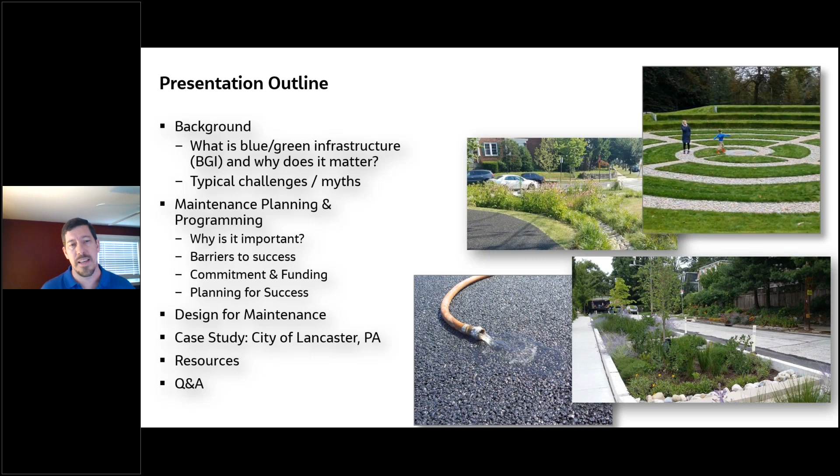How can we plan for success? And then the next step after planning, how can we design for maintenance, for better maintenance, more feasible and easier maintenance? At the end, Kate is going to talk about her experiences maintaining green infrastructure in the city of Lancaster, Pennsylvania. We'll close with some resources, a lot of good links, helpful, useful links, and then hopefully have some time for Q&A.

So before we dive in, we do have a poll question that should come up. The question is, are you planning to implement blue-green infrastructure in the near future? And the answer is multiple choice: yes, we have implemented some type of BGI; yes, we're planning to, but we haven't done so before; we are considering it as a possibility; or no, not unless we're absolutely forced to do so. We'll give everyone a couple seconds to fill this out.

And we can see the results here. More than half of everyone on this call has implemented some type of BGI. About a third is considering it as a possibility, and about 12% said yes, we're planning to, but we haven't done so before. Then 6% of you said no, not unless we're forced to, or we have to for some reason. So good to know where we stand. Thank you for answering.

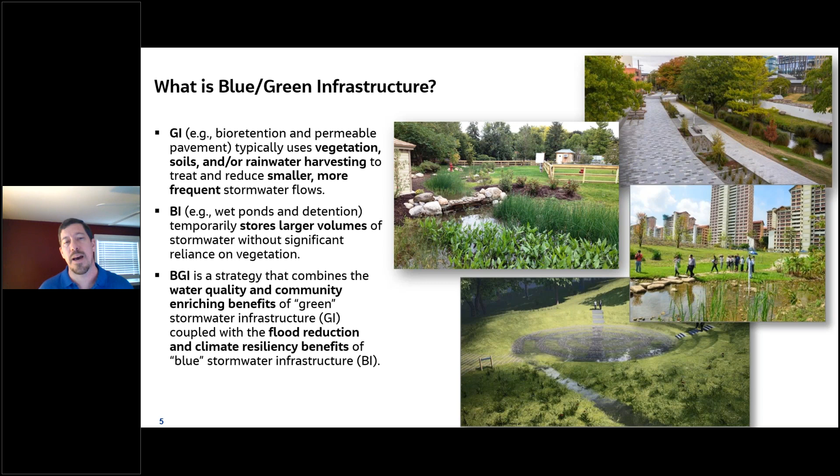Green infrastructure, on the other hand, is things like bioretention, permeable pavements. These are systems that use either vegetation or soils or rainwater harvesting to treat and reduce the smaller, more frequent stormwater events. When we put those together, it becomes a strategy for controlling or treating water quality, having community enriching benefits—that's the green side of things. And we also couple that with the blue side of things, the flood reduction and the climate resiliency. So that's really what we're talking about here when we say blue-green infrastructure.

So why does it matter? Well, it matters because it's responsive to regulatory drivers, whether it's new or redevelopment stormwater regs, MS4 requirements, CSO requirements, or green building certifications. There's a variety of these regulatory drivers that exist and really push the use of blue-green infrastructure.

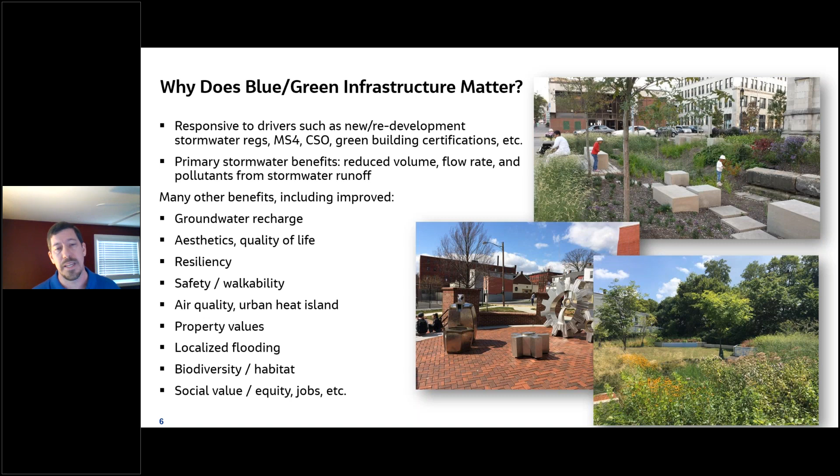Of course, the primary benefits are reduced volume of runoff, reduced flow rate, and reducing typical pollutants in stormwater runoff. And of course, there are lots of other benefits from groundwater recharge to resiliency, improved aesthetics and quality of life, improved safety and walkability, localized flooding reduction, and biodiversity. The social value, equity, and jobs creation are all real and quantifiable benefits of blue-green infrastructure.

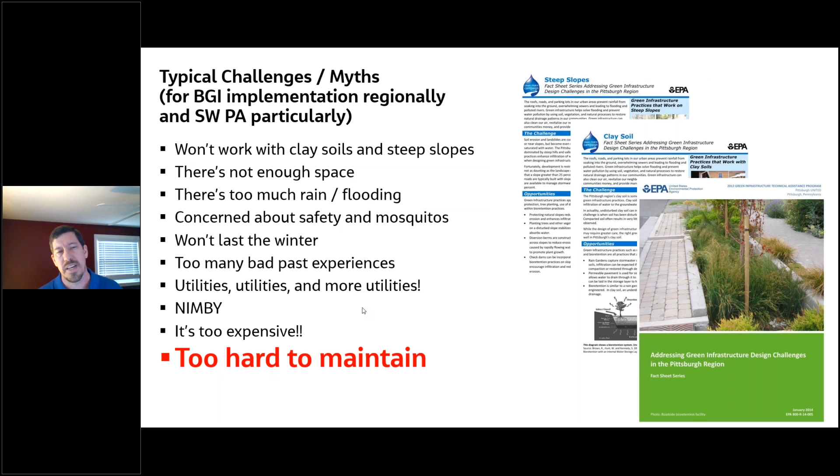But of course, it's not easy. There are real challenges to implementing blue-green infrastructure, and there's also myths, perceptions that are out there. Of course, we've all heard these.

Maybe we think these: that blue-green won't work with clay soils or steep slopes, there's not enough space, there's too much rain, too much flooding. What about mosquitoes? The winters we have here are so harsh it's not going to last the winter. We've done it before and it hasn't worked, too many bad experiences. We have so many utilities, how do we work around those? We've all heard NIMBY, not in my backyard, we just don't want it here. It's too expensive. And then, of course, what we're really focusing on today, it's just too hard to maintain.

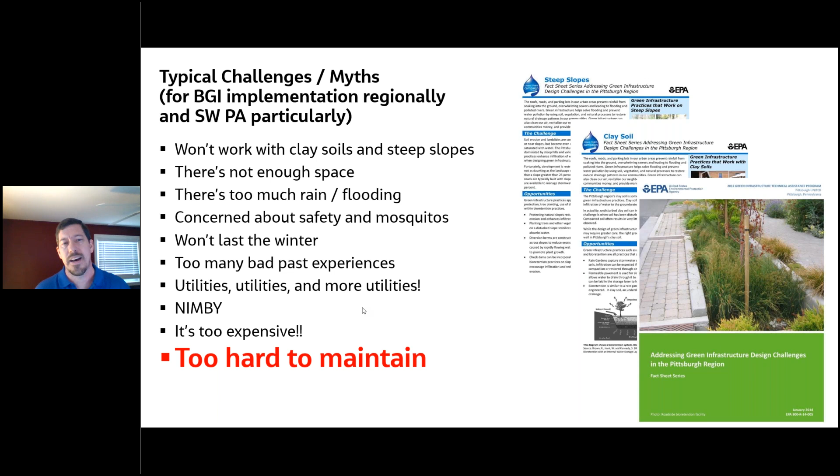So is it really too hard to maintain? Is that a challenge, or is that a myth? I think it's a little bit of both, and we'll get into that and hopefully dispel the myth that exists around it. So why is maintenance critical?

These are fairly obvious. Of course, it ensures the long-term performance of these practices. These are capital investments, assets we're putting in our communities, so we want to protect them. It's important for aesthetics, we don't want these practices to become eyesores. We have to meet regulatory requirements, whether on the public or private side. There are public health issues, like the idea of mosquito breeding. There's public community perception, when we see water in a rain garden or bioretention area, is that water supposed to be there? Is that ponding normal? We have children that play in these communities, on these streets and in these parks.

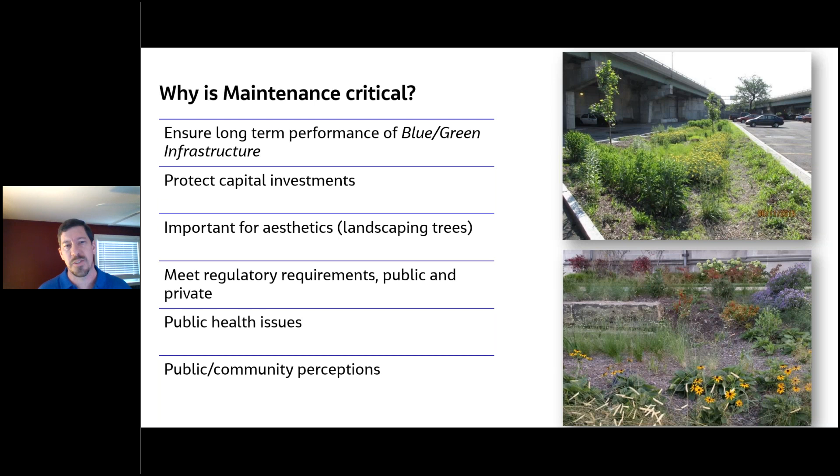And of course, there are a lot of common failures and lessons learned. These are all real world examples. There's the lower left-hand corner of a porous asphalt installation. We might look at that and think, well, it's about time we seal that up. The lesson learned there is that signage and education matter. We have to get the word out that this material is porous, and you don't want to repave over it or seal it. What are those weeds doing in that planter?

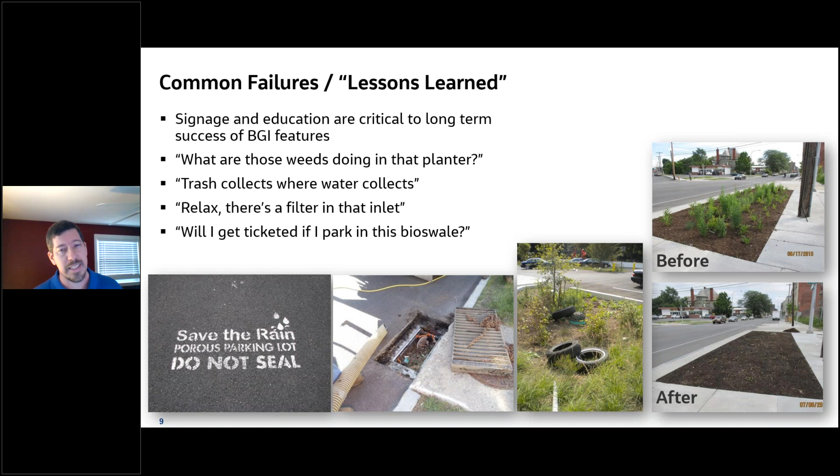On the right side you see an example. The before shows a stormwater planter alongside a street. A resident living right there thought those were all weeds and pulled them out. Of course, trash collects where water collects. Bioretention areas in residential developments might look like good spots to toss old tires or other trash lying around. And of course, we put in things like filter inserts and may think, well, just relax, there's an insert in there, we don't have to worry about that for a while, we're good. That's obviously not the case. Everything does have to be maintained.

And of course, there are a lot of barriers to effective blue-green infrastructure maintenance. There's a lack of funding for operations and maintenance, which really comes down to resources. Maybe our communities don't have the specialized equipment or staff we need. We don't have the training for the specialized needs of blue-green infrastructure, or consistent inspection and maintenance procedures or enforcement policies. And the public's just not aware of what these things are, what they do, or how they should function.

So I'm going to turn it over to my colleague Susan now, and she's going to get into how we integrate new and different O&M protocols into our existing O&M programs and operating budgets, and how we really institutionalize blue-green infrastructure maintenance.

Thanks, Dan. If I get control here.

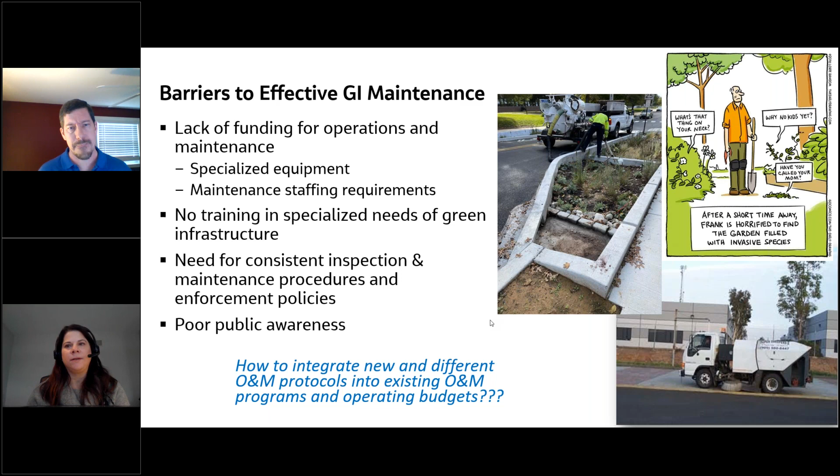There we go. So I'm going to talk about maintenance planning and programming, and I think these strategies really can be applied, scaled up or scaled down depending on the level of implementation within your community. Just to start, we'll run through some of the key strategies for BGI O&M planning and programming. I think these types of strategies really go along with any kind of major initiative within a municipality or region. Commitment and funding is clearly the most critical element to start and get things moving. And in addition, planning and design are very important in terms of designing and planning for minimal and/or effective maintenance for any kind of green or blue-green infrastructure program. Gaining community endorsement is critical.

And looks like we've got some kind of, I don't know what that is, sorry.

Gaining community endorsement is critical. Establishing policies and standards for O&M, education and training, and then monitoring and tracking those BGI systems is critical. So we'll touch on all these.

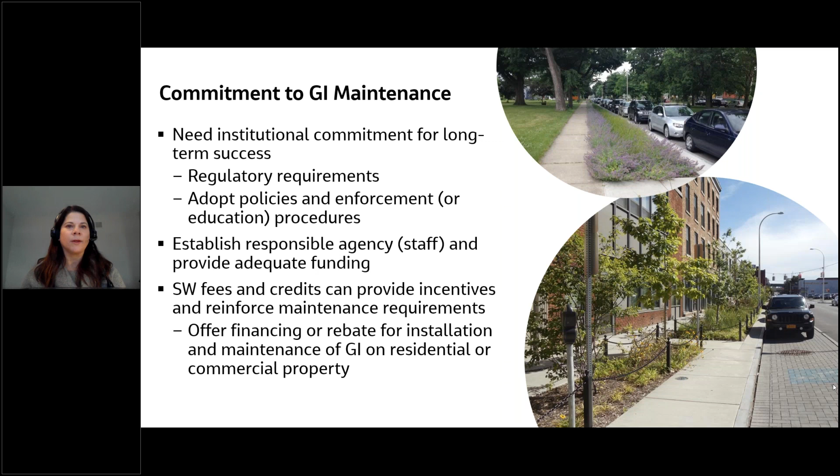In terms of funding, some cost considerations, I think it's really critical to first of all establish a business case for green infrastructure maintenance, really looking at the incremental costs of maintaining green infrastructure compared to conventional infrastructure, because everything requires maintenance.

Oftentimes, green infrastructure maintenance with respect to landscape is very similar to any other kind of parks or landscape maintenance budget, so that can be incorporated within already existing maintenance budgets within a community.

Looking at economies of scale is a cost-saving strategy. It's a lot easier to keep maintenance crews busy full time. The more green infrastructure that you're implementing, oftentimes that can help be a cost saver. Also, when you're implementing, you can outsource these as contracts. So if you have a number of bioretention type systems, you may be able to outsource that to a landscape contractor and have an economy of scale savings there.

Note that O&M costs really do vary widely. It depends on the size and complexity of the green infrastructure system. Very highly visible locations will typically require more maintenance than a system that's not as obvious to the public. So all of those things factor into maintenance, and also maintenance is adaptable.

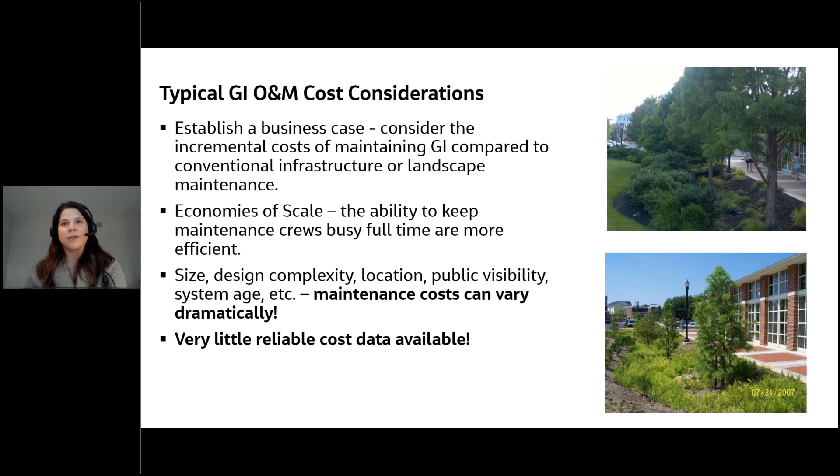There's not a whole lot of reliable data out there right now in terms of cost, so a lot of organizations are having to look at what their own costs are in order to plan for that. As an example, here are some typical O&M costs per square foot for green infrastructure.

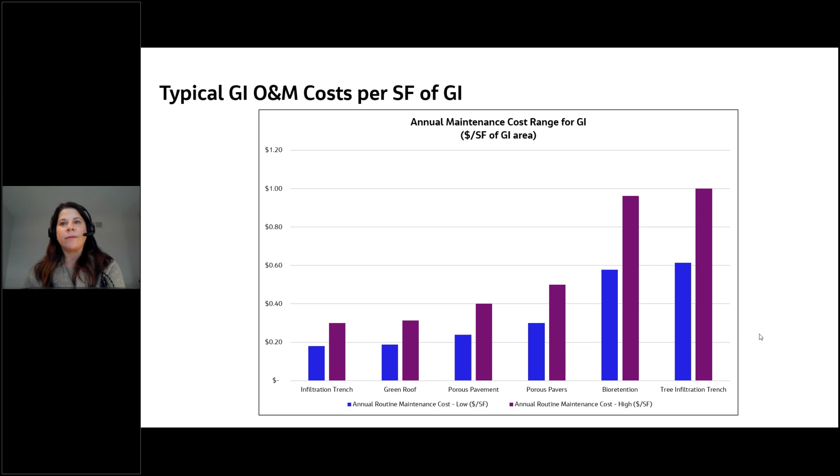When we look at this, we can see that vegetated systems like bioretention on the right and tree infiltration trenches tend to be more expensive on a dollar per square foot basis, simply because they tend to have a little bit more maintenance required associated with the vegetation.

But when we look at O&M costs per acre of impervious area managed, bioretention costs look a little bit lower, because typically you can direct more runoff to a bioretention area, and it can manage more runoff per square foot than, say, a porous pavement system that's just receiving the runoff that lands on it. So there are different ways that you can manage your budgets and look at how cost-effective various green infrastructure technologies are.

Some strategies for paying for green infrastructure maintenance: stormwater utilities, I would say, are a very popular method. They provide a stable revenue source and an equitable approach. Typically, these fees are based on area of impervious surfaces for each property owner, and they also help to incentivize private investment, either through credit programs or other means that might allow for cost savings for those paying the fees.

Some other strategies are alternative financing, such as public-private partnerships. An example in Lancaster: the city got PENNVEST funding and was able to partially fund private green infrastructure projects, and the private property owner had to sign an agreement to then maintain it. So the city was able to help fund those systems, get a benefit from a green infrastructure perspective, and the private property owner was responsible for maintaining it.

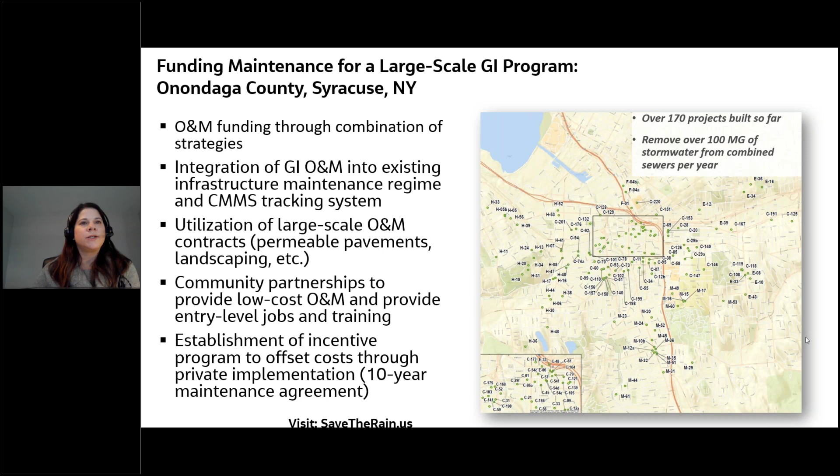Quite a lot of green infrastructure, and some of the strategies Onondaga used were, first of all, incorporating green infrastructure into their existing CMMS tracking system. So they took an asset management approach and developed a maintenance, training, and inspection program.

They also utilized large-scale O&M contracts as a cost savings for things like permeable pavements and any landscape O&M. They entered into community partnerships to provide low-cost training and entry-level jobs for disadvantaged youth, giving them summer jobs to help cover the O&M of those landscaping type BMPs and GI.

And then they also established a grant incentive program whereby they would help fund green infrastructure on private property, where the private property owner had to sign an agreement to maintain that GI system for at least 10 years. So these are just some of the strategies used in this particular program.

And we mentioned O&M and green jobs. Green infrastructure does require a workforce with new skills. It can create long-term permanent jobs, whether it's inspection or maintenance.

And we talked a little bit about how youth can be engaged, and part-time, entry-level jobs can be incorporated into a green infrastructure program. This is done in Onondaga, and I think Philadelphia also has a similar program.

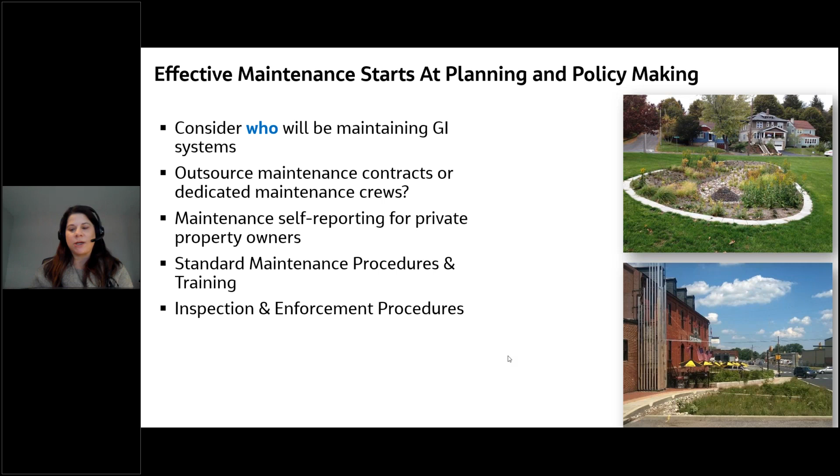Sorry, I went too far here. So here's an interesting case study from Milwaukee Metropolitan Sewer District. For this study, an O&M framework was developed based on stakeholder input to figure out, within the sewer district which has had a number of municipalities, who should be responsible for doing the maintenance, whether it should be a regional entity, controlled by the municipalities themselves, or a private endeavor. And the framework was looked at based on financial considerations, the ability to be implemented, and social and community impact.

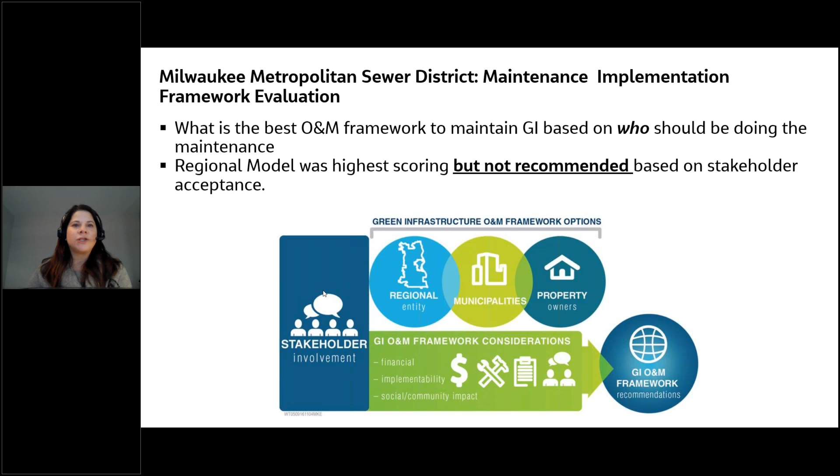Through that polling and study with the stakeholders, it was recommended that the most cost-effective model would be to have a regional maintenance entity, but based on feedback from the stakeholders, it really wasn't recommended because municipalities and private property owners wanted control over their own maintenance. So in the end, the recommended cost-effective model wasn't acceptable to the stakeholders, and it was modified so the regional model was really only used for training, while all other maintenance control and responsibility was at the municipal and private level ultimately.

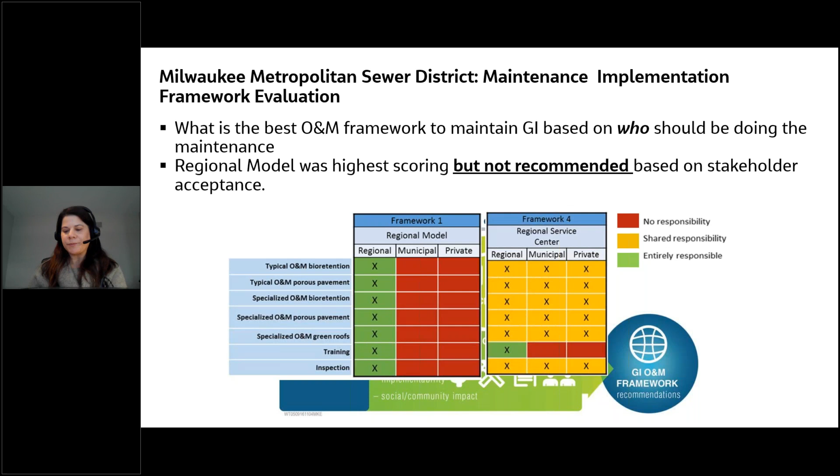When developing standard maintenance procedures, I think it's critical to understand that many of these maintenance activities for green infrastructure are not all that different than the maintenance that's already occurring at the municipal level, in terms of inlet cleaning and landscape maintenance. A lot of it is quite similar.

The maintenance procedures will vary based on system function, visibility, size, drainage area size, and the type of land cover. Green streets typically have a lot more maintenance than a park site, simply because of the usage and the amount of dirt and debris you find on a street compared to a park. As we mentioned before, visibility matters.

Anything that's visible on the surface will typically require more maintenance. At the same time, having a visible surface system is also very helpful because you can see when a system actually needs maintenance.

Inspections should be established, an inspection routine, and a lot of times that's required for regulatory requirements. And as we mentioned earlier, maintenance will vary through time, so adaptive management is important to consider.

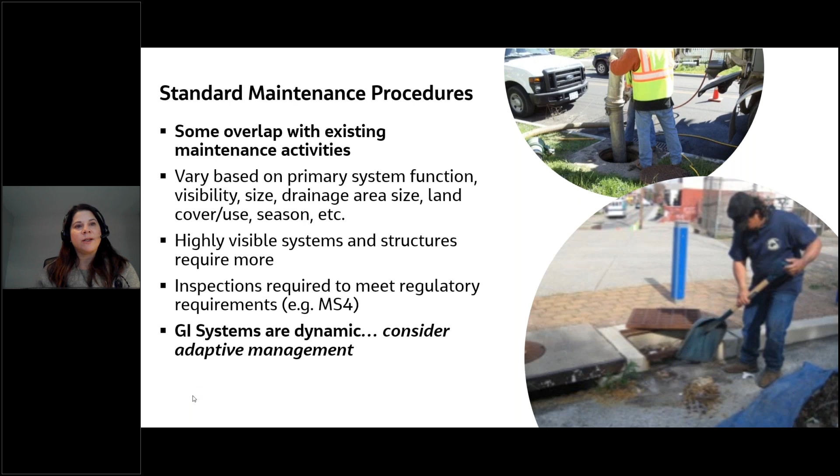Differences between blue versus green infrastructure maintenance: when we're talking about blue infrastructure, larger storage systems tend to have more concentrated flows into a large system, with larger drainage areas. But given that those systems are often designed with more robust pretreatment, sediment, or trash forebay, those types of larger systems often require typically less maintenance, or reduced frequency of maintenance, as long as those pretreatment systems are built in.

Green infrastructure tends to be more distributed, with smaller drainage areas, so it's many small systems. Depending on the visibility or type of system, they may require more frequent inspections and cleaning, simply because a smaller system isn't going to have the ability to have a larger, robust pretreatment type. The combination of both, obviously, they overlap.

It really depends on the technology that's being used. But even a large bioretention system is going to have a similar maintenance regime as a small bump out, for example.

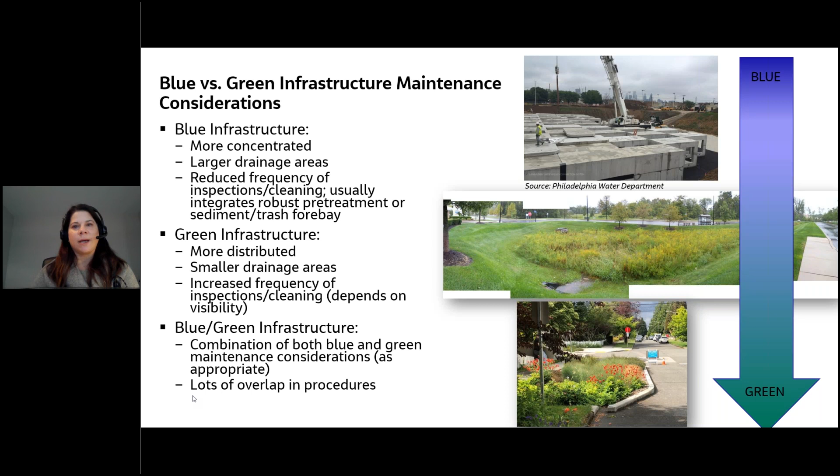A case study example here: O&M guidance manual. This was actually developed by Alcosan, who implements a grant program to its member communities to help fund green infrastructure programs, and they put out a number of guidance manuals, one of which was an O&M manual.

The manual established maintenance regimes for routine, non-routine, and general maintenance activities by green infrastructure type, and they looked at the typical green infrastructure systems they were funding, which were infiltration trenches, bioretention, and permeable pavements, the three categories. Their plan covered maintenance frequencies, and you can see an example of that here.

The frequencies are established dependent on service level, whether it's high, moderate, or low service level, and that touches on what we were talking about before with respect to visibility and type of GI technology.

For the purpose, they also developed maintenance inspection checklists, including a self-certification process whereby the grant recipient would need to submit an annual self-certification form to Alcosan to demonstrate that they had been maintaining the system that was funded. All of this was designed to protect Alcosan's investment.

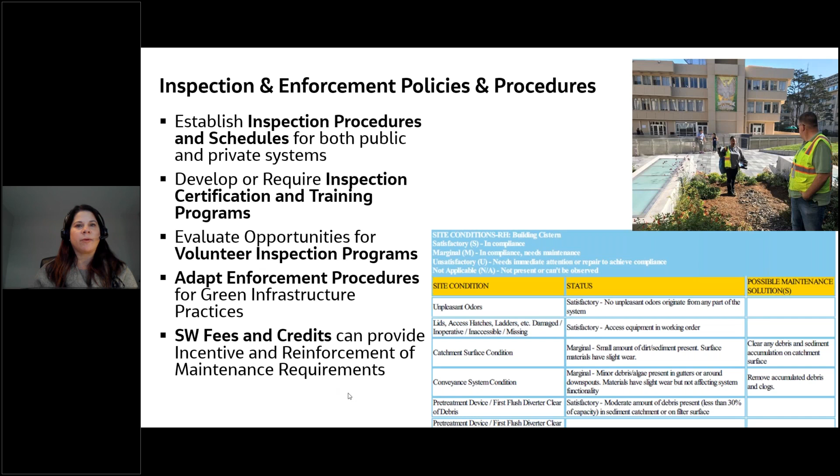And we talked a little bit about fees and credits, which can help to provide incentives for maintaining the systems.

Another case study here from San Francisco Public Utility Commission. As part of their MS4 permit and their stormwater ordinance for developments on both private and public properties, in order to get permitted, the green infrastructure system needed to have a maintenance plan. The property owner would then be required to submit a self-certification checklist on an annual basis.

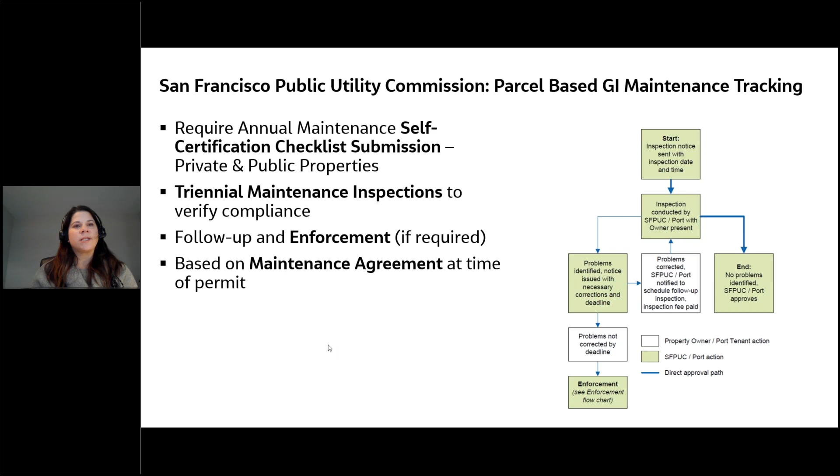The Public Utility Commission themselves actually set up their own triennial maintenance inspection that would go out to each of these public and private sites and inspect them to ensure they were actually being maintained. The program included enforcement if they were found not to be in compliance. So, a pretty robust program out of San Francisco for their MS4 permit.

And then just some information on training. There's a number of training programs out there for green jobs training, and this is just a listing of some of those here. I won't go into them, but I'm sure many have heard of the National Green Infrastructure Certification Program. That's probably one of the biggest ones, but there's also one in Chesapeake Bay, Maryland, and some other states throughout the country also offer contractor training and maintenance training for inspectors as well as contractors that would perform the maintenance.

And we have poll question 3 here before we move on to Kate. So what are the greatest challenges or concerns you have regarding maintaining blue-green infrastructure? Cost, lack of resources whether it's equipment or staff, already having too many things to maintain, training, or other.

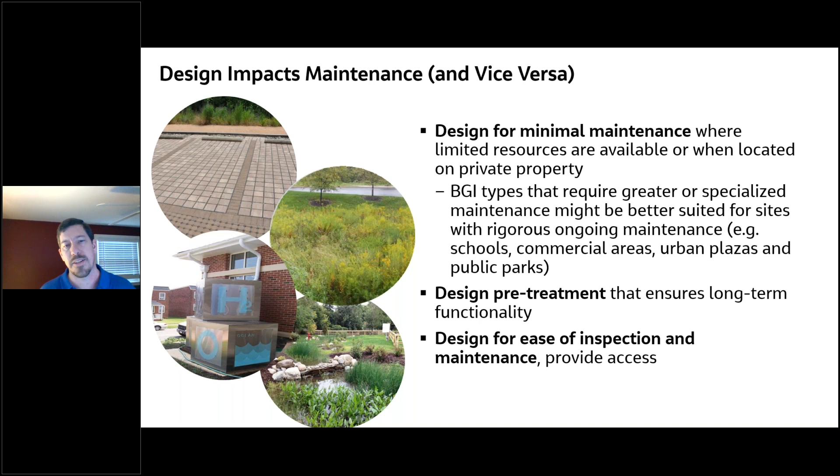So I'm going to go into a little bit more detail, not too much, but on the vegetation side of things. I'm an engineer, I'm not a landscape architect, so bear with me a little bit here. But we first really need - and this gets back to the context of the site - we have to understand the context, the soil conditions, the hydrologic conditions.

For example, if we are designing a bioretention system with very sandy soils, we want to make sure that our plant species are drought tolerant. Those soils could drain out pretty quick and could create dry conditions. We want to make sure we're designing for that.

If we're designing green infrastructure in the roadway, which we do all the time, and the city of Lancaster has numerous examples, we want to make sure that the plants that we're specifying are salt tolerant. They can handle that environment, they're going to thrive in that environment. We want to make sure that we're avoiding bare areas, and I'll get more into that in a second. We want to consider a layered or mixed plant community approach rather than just large swaths of species.

And we'll talk more about that in a second too. Really, we have to be realistic about the maintenance capabilities, the resources that are at our disposal, and the preferences of the community. We can't ignore any of those things.

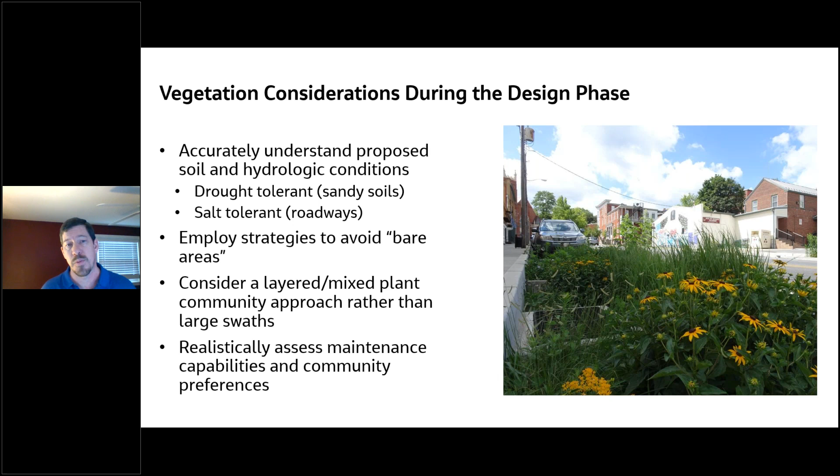Back to the employ strategies to avoid bare areas. Really, we're concerned about two things here: erosion and weeds. With erosion, we want to think about how we can prevent against it. We might want to use biodegradable erosion control fabric, especially on slopes, knowing that before the plants are established, those slopes and soil are going to be susceptible to erosion. So we want to make sure that we put in the fabric as needed.

We want to place tougher plants near points of entry to runoff, and they're going to act as natural energy dissipators. That's not necessarily replacing, but more like in addition to structural energy dissipators that we might have using concrete or rocks or things like that.

We want to plant densely, using a denser spacing to eliminate the opportunities for weeds. And we want to consider a layered plant community approach. This is the idea of green mulch, where we use diminutive filler species to fill in the gaps. Doing this layered approach really does improve the resilience of the system, especially to varying conditions of light and water.

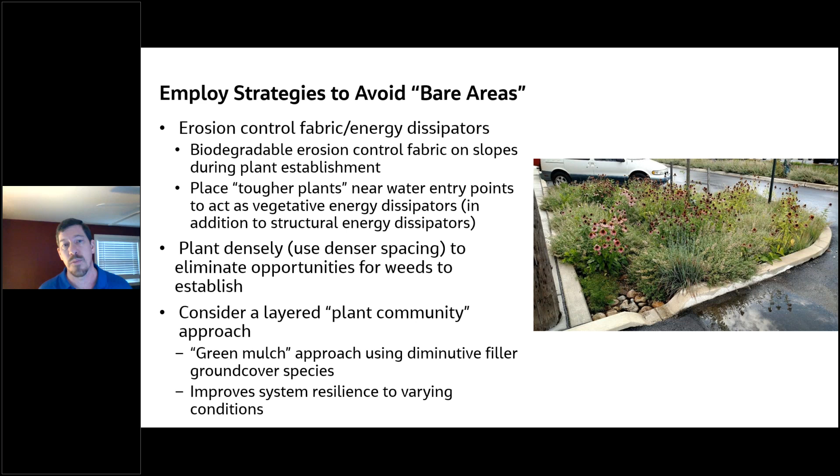So we want a hardy, robust, resilient system, especially when it's in the roadway. And again, we want to realistically assess the capabilities of our maintenance staffs and our community preference. We want to try, if possible, to keep our plant palettes simple, maybe lump together those species that have similar types of maintenance. So maybe grasses and perennials get lumped together and shrubs are separate.

Maintenance staff may not know how to distinguish between weeds and the desired plants in those systems. I have a rain garden that takes up half of my front yard, and I've been working with green infrastructure for years, and I struggle with: is that a plant? Is that a weed? It's hard to tell, and so we really do need to make sure we provide our staff with the proper training and the proper resources.

And then with respect to the community, we want to think about what they might like. Is a more naturalistic palette, which will look weedy, is that okay? Or do we want something that's more garden-like? So we've got to keep all these things in mind.

Now we have a quick activity here. We're not going to do this as a poll, we're just going to run through these. But this really is meant to be fun, just to test your knowledge of is it a weed or is it a plant that we would use in a green infrastructure system like bioretention.

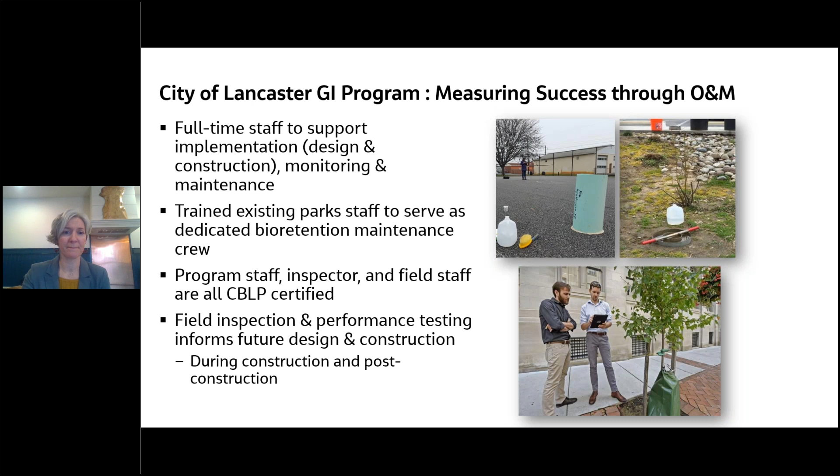Some of the things we're also tracking are the design performance of these systems, gallons of stormwater we're capturing annually, and how many permits and credits we're issuing each year. We have a stormwater ordinance that requires installation of stormwater management practices for any installation of impervious surface over 100 square feet, so we have a number of permits going through every year—projects implemented by the city on the public side, and also privately through that permit system. We're also tracking the pounds of nutrients diverted, as well as all of our public outreach and interactions.

We really see public engagement as a key piece to the success of our program, making sure residents understand and appreciate the green infrastructure projects we're investing in with their tax dollars. Because it's such public-facing infrastructure, we often get a lot of questions and interest, so it's important that we're always ready to engage with residents.

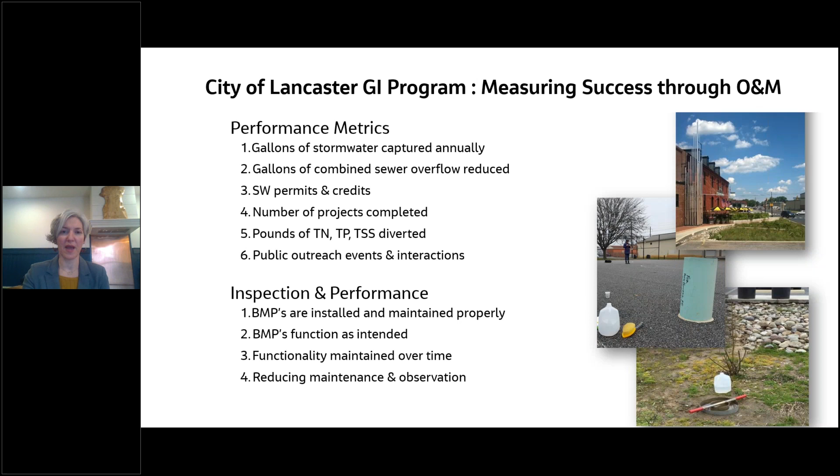In terms of inspections, like I said, we're doing that on a monthly basis, really tracking functionality over time and identifying problem areas that need to be addressed, and if we have something more significant, what might need a more in-depth corrective action.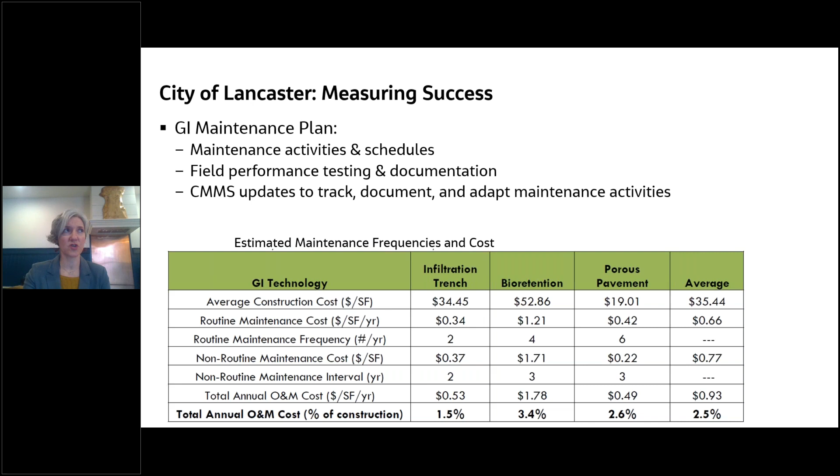Susan had touched on a little bit the varying costs of O&M for green infrastructure and gray infrastructure. So we have our estimated costs, and one of the things we're hoping to track over time with our asset management is our costs for our green infrastructure maintenance program. We're tracking both the time spent doing the maintenance itself and any equipment used—vehicles, everything of that nature—so we can have a full picture of the real cost. We've just started tracking this in the last couple of years, so we'll be able to start compiling that data.

All right, so let's talk a little bit about Brandon Park—I think it's going to load in some layers here. This is a large public park in the southwest part of the city. When we were starting to install green infrastructure demonstration projects at the beginning of our program, we first prioritized public parks as great opportunities for installation. We were also at the time looking at upgrades to our park system throughout the city, and the timing worked out well for also including green infrastructure.

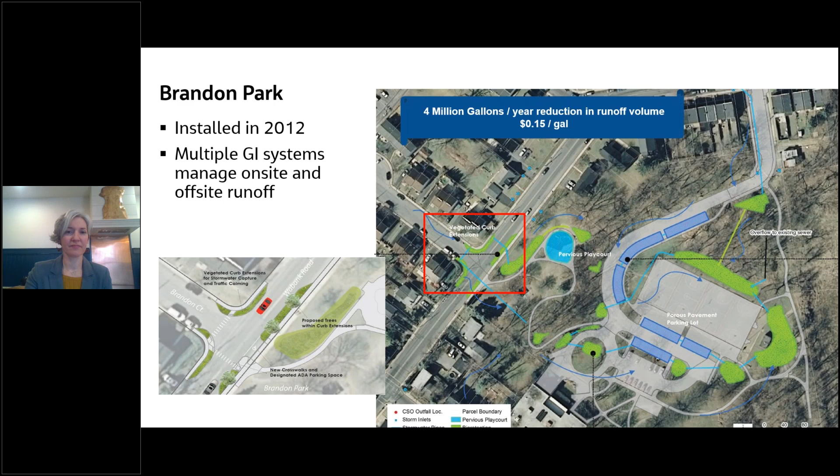In Brandon Park, we have a system of about 20 interconnected rain gardens that are under-drained and flow into each other, as well as a 4-court porous asphalt basketball court and some porous asphalt paving in the parking areas. So we're capturing a significant amount of stormwater runoff from the impervious areas in the park itself, as well as some adjacent surfaces from the surrounding residential areas—getting that 4 million gallon reduction a year there.

Some of the issues we've faced in Brandon Park—we've learned a lot of lessons since this was an early installation. We've really identified where we're seeing issues with soil erosion from runoff from adjacent impervious areas, and where we've needed to either put in tougher plants in those entry areas, or sometimes reinforce with stone to address those areas of erosion. We've also had challenges with the initial planting density being a little on the lower side.

When we started many of our installations, the plant palettes were more larger shrubs with a minimal amount of ground cover perennials. We've really changed our plant palette over time—while we still use shrubs in our plantings from time to time, we look at that density of planting that Dan talked about, really having that layered plant community approach. That has helped improve the success of the vegetation in the systems and their performance over time.

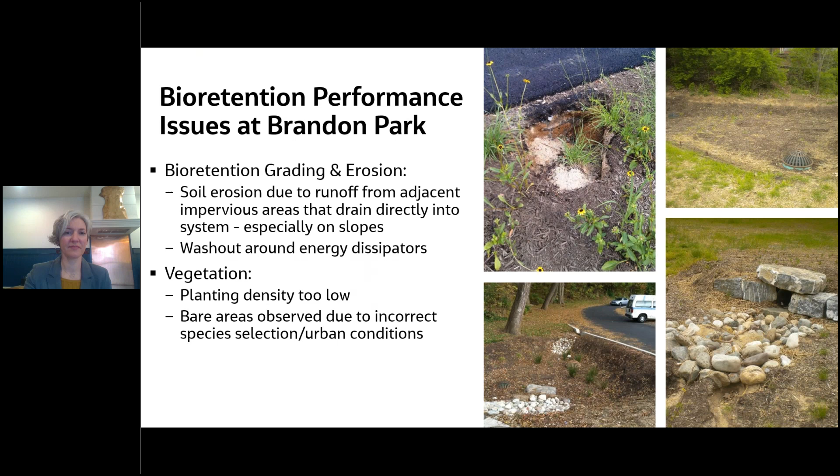So in addition to our park projects, we, as we're in the Department of Public Works, looking at public right-of-ways and opportunities for installation of green streets. There's a lot of challenges that come with those opportunities. We're a very old city with old infrastructure, and we're a pretty small, dense city. We're only 60,000 people, but about half of the city is impervious.

There's not always the wide spaces, we have pretty narrow streets. So when we're looking to install these, it can be a challenge. We have to consider utility conflicts, making sure to protect our existing tree canopy that we're looking to increase, and we certainly want to protect the ones that are in place. Looking at things like street slope and limited space.

Because these are very public spaces, this is the right of way, public perception and education is very important so that people understand what these areas are. One of the big issues we deal with in public perception is making sure that we lose as few parking spaces as possible. That is the quickest way to lose public support, is to eliminate parking spaces. So we want to take that into consideration as well.

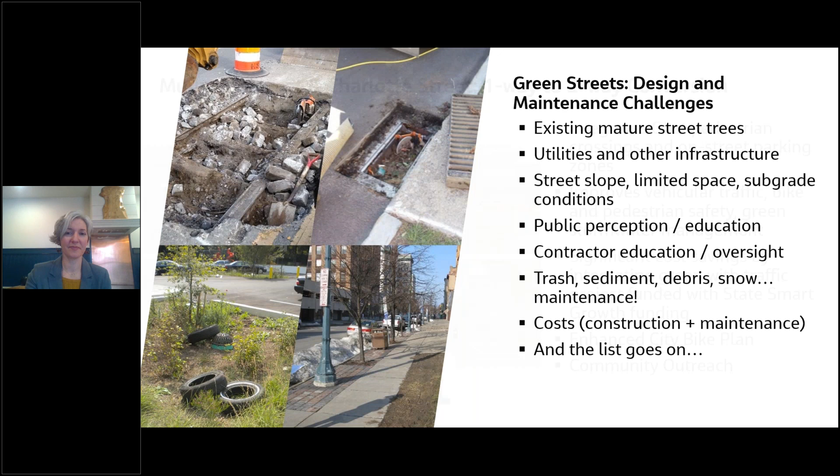So two of our really successful projects that we have installed in the last few years, we were able to convert two formerly one-way streets to two-way streets: Mulberry Street and Charlotte Street within the city.

And with both of these projects, we really took a complete streets approach to the design. So of course, from the stormwater perspective, we wanted to prioritize installing green infrastructure, but we really looked at how we could utilize green infrastructure to provide a safer travel area for vehicles, for pedestrians, for bicyclists, and all users of the roadway and the sidewalks. The curbside rain gardens or bump outs really are able to serve as traffic calming by narrowing the roadway width, and also creating safer areas for crossing for pedestrians.

So looking at all of these combined, and also being able to leverage the cost savings of looking at a capital project that we were looking to invest in, and had a palette of funding opportunities that come with the roadway work, leveraging that to be able to also install the green infrastructure. Pulling all of this together really made for a financially feasible project at a very large scale. Both of these streets we were looking at about 5 city blocks, so pretty significant in size.

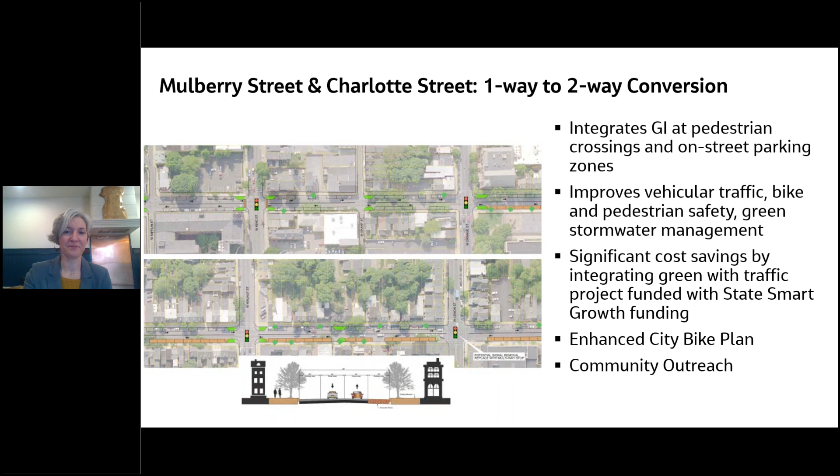And yeah, so collaboration and adaptive design are really the keys here. Internally, the collaboration we're looking at is with our city planning department, looking at enhancing the bike lanes, tree plantings and protection, community engagement, working with PennDOT for state roadways, and looking at any additional reviews and specifications that are required there. Integrating the design from everything with traffic, signals, green infrastructure, utilities.

Utilities is always a challenge because our utility companies are frequently doing work in the right of way, and we want to coordinate with them the best that we can to make sure that we are taking into account any work that they will be doing, and hopefully scheduling it so that we can phase it in so that our newly installed surfaces are not immediately being torn up for utility upgrades. So having those open conversations have been really important.

Working within the Department of Public Works, the Stormwater Bureau works closely with our engineering department. In terms of adaptive design, we're really looking at how to simplify the grading when dealing with slopes on our roadways, to create more level beds for runoff to infiltrate into the soils.

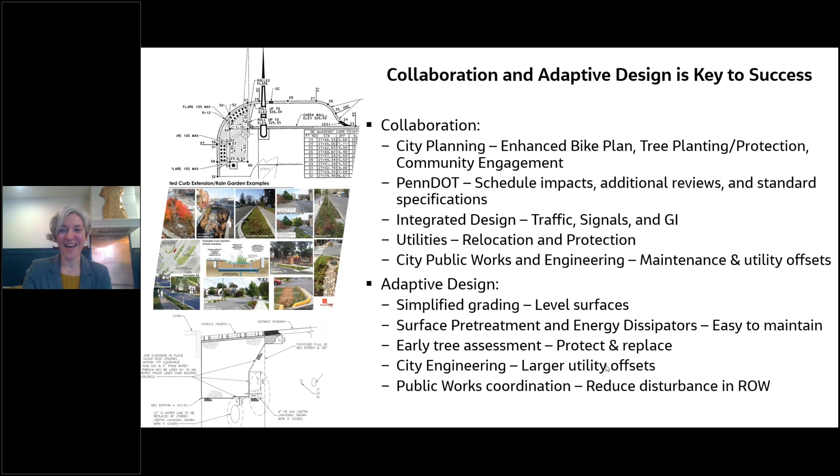It looks like things are frozen up here, that's the problem. So maybe we'll see if we're going to advance or not. Okay, there we go, there we go.

This is looking a bit more at that simplified grading I just talked about, creating level beds for infiltration and for the health of the vegetation. Not having steep side slopes has been really important.

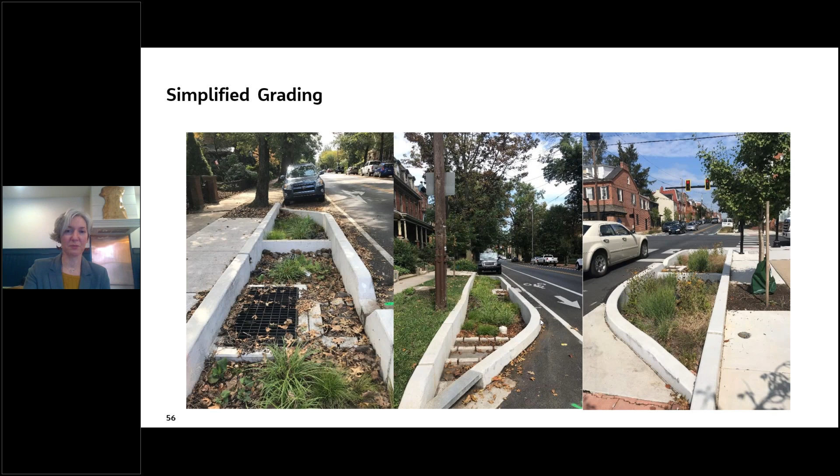Looking at that pretreatment, stone cobbles have really become kind of the bane of my existence when used as pretreatment. They tend to get really filled with sediment and are very difficult to clean out.

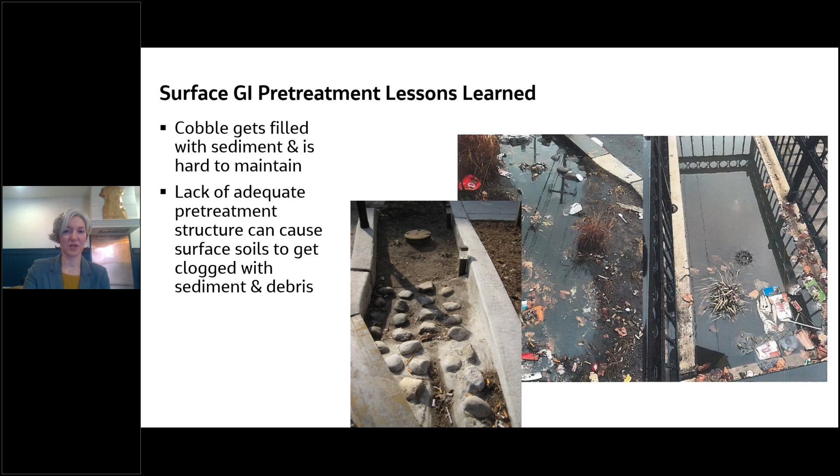I'll move to the next photo to show what we've moved on to as a design alternative. Instead of a large area of stone cobbles where water enters the system, we've moved to a concrete sediment forebay with toothed edges to serve as energy dissipation, which has performed a lot better for us.

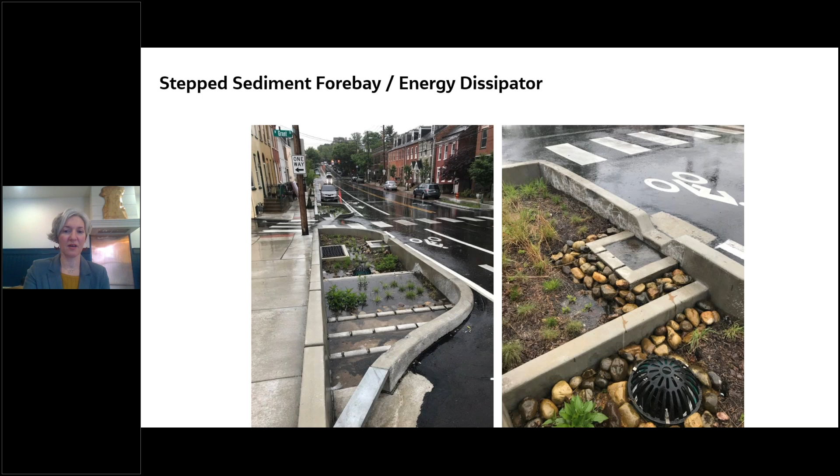I'll show some before and after photos, I believe the next one. This was a retrofit to our project at Plum and Walnut Streets. You can see in the first image the channel of cobbles where the water would enter.

This became incredibly laden with sediment and very difficult to clean out, so we actually removed all of it. We did this work in-house, removing the stone cobbles and installing this pie-shaped sediment forebay.

What's really nice about this is, it's a little counterintuitive installing more concrete into a rain garden, but what we lose in pervious area we gain in the ability to intercept sediment accumulation before it gets into the soil. Because it's so highly visible on the concrete, it's very easy for our maintenance staff to get in with a vacuum attachment or just a flat edge shovel and clean it out.

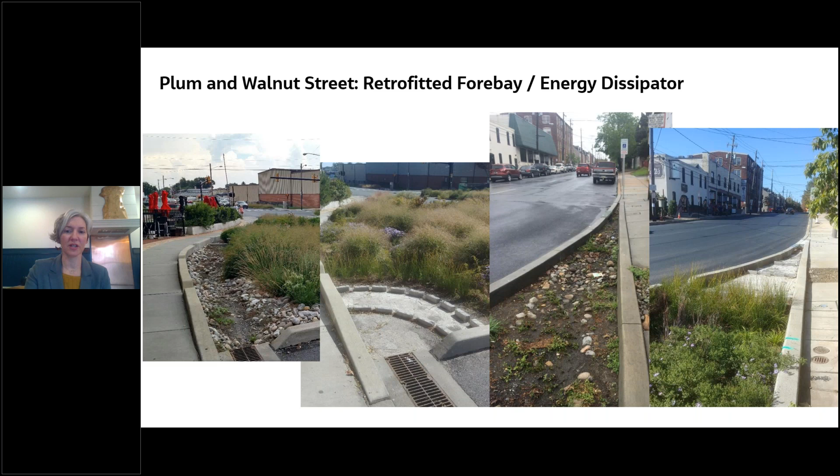We've also started introducing some more integrated inlet and pretreatment structures, like the Rain Guardian products the Turret and the bunker.

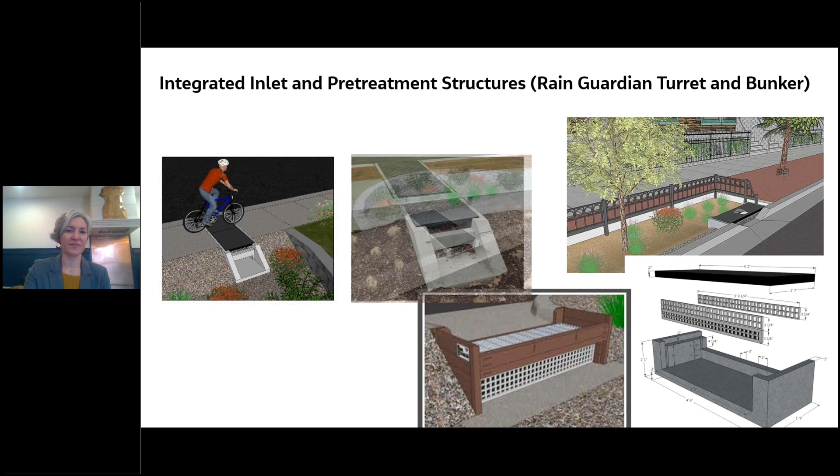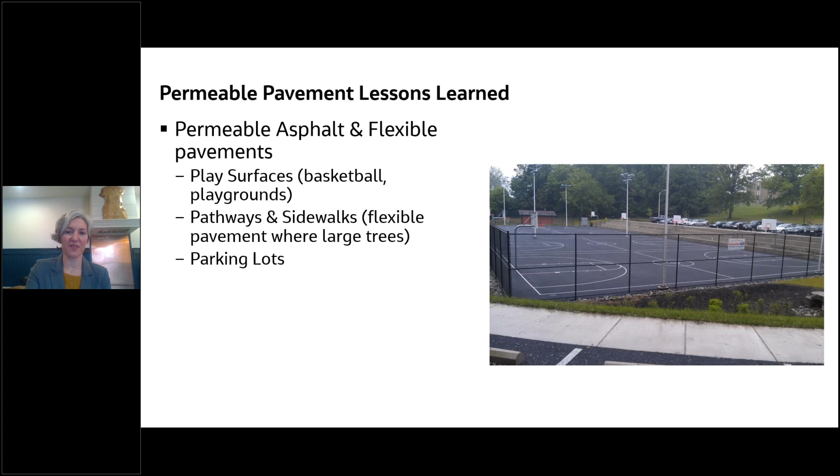Then we'll wrap up with some permeable pavement lessons learned. We've installed a significant amount of permeable pavement throughout the city, whether asphalt, permeable concrete, or pavers. We've used it with great success in areas like basketball courts, and with more challenges in areas like our private alleys. This is an example, the forecourt basketball court at Brandon Park.

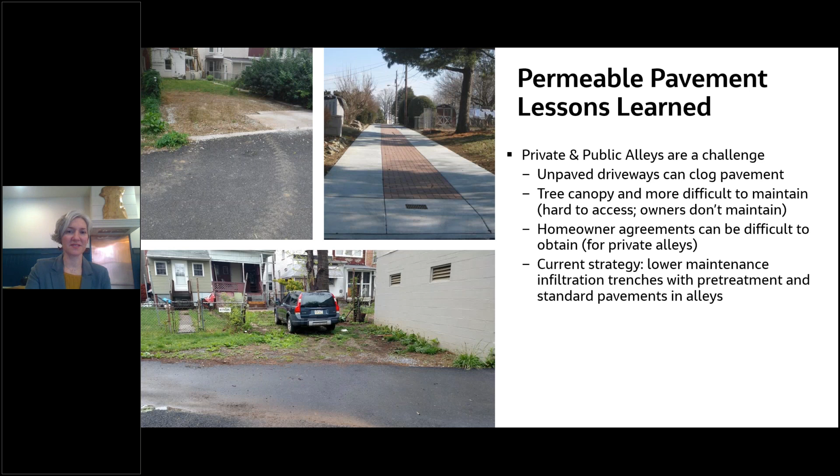We've really learned that adjacent surfaces make or break your porous pavement installation. Where we have alleyways with unimproved parking spaces, sediment driven over the surface quickly clogs it. Tree cover and leaf debris can also be a real challenge for porous pavements, requiring a much more rigorous maintenance schedule of vacuum sweeping. So we've found a lot more success in open spaces with less tree cover, like basketball courts.

In our roadways we've looked at introducing permeable pavers. These systems work really well; if we have an issue with clogging, we can pull out some of those pavers and address the issue directly rather than dealing with the entire surface.

The lack of gravel between these pavers, which have lugs on the sides to keep the spacing for water to drain in, makes maintenance fairly easy. We use our vacuum sweeper to maintain and restore the porosity of those surfaces.

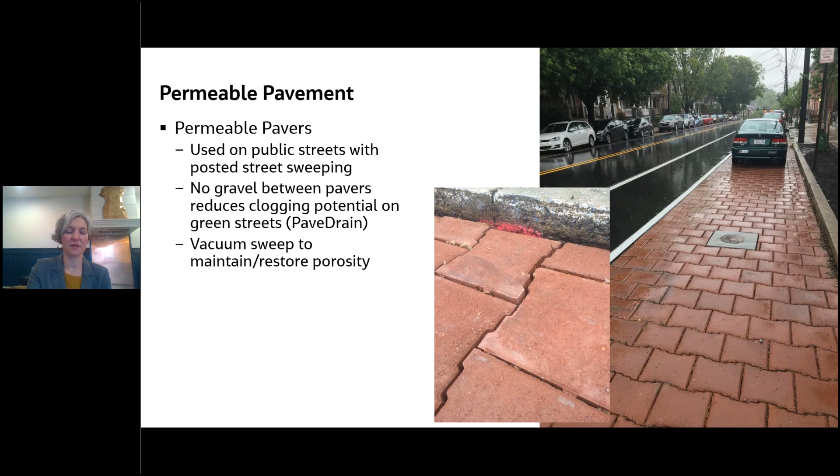With that, we've got some resources that you're welcome to take a look at, and we're happy to share. I'll go through those quickly, and then we can move on to some questions.

Awesome. It looks like we still have some folks on the call. I don't know if any questions have come in on the chat, at least I'm not seeing them. But a lot of great lessons here. I think the good news for other communities is that cities like Lancaster have been doing this, maintaining and learning all these hard lessons. So Kate's misfortune could benefit other communities, learning from these hard lessons in designing, implementing, and maintaining these projects.

Hey Daniel, this is Megan. I have questions that came in. The first one is for Kate: what keeps you up at night regarding GSI?

Oh, good question. I think that because we installed so many demonstration projects early in our program, and we didn't have an active inspection or maintenance program until 2016, really, we had like a good four years where we were addressing some things but not everything. So keeping up with the retrofits that are now required is always harder, since it's harder to find funding to fix a project that's not functioning well than it is to install it in the first place. That's probably one of our big challenges.